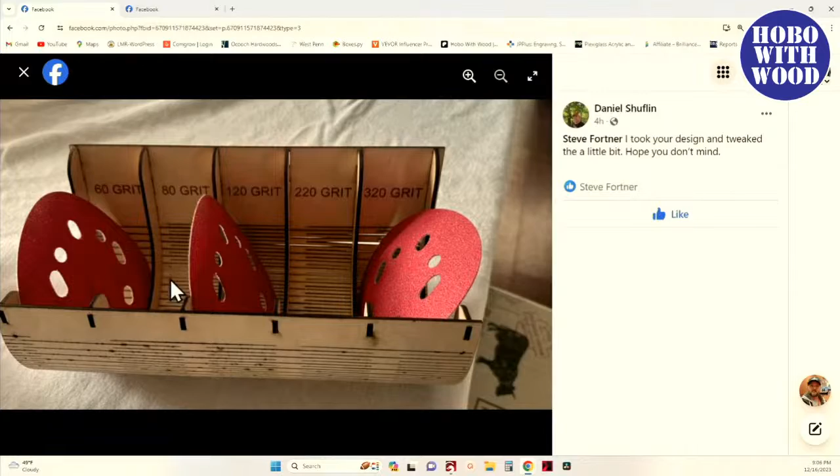That is a really neat way to organize them and set them up. There are a couple of little flaws in here that could be made better. The living hinge is a little rough, but I'm going to show you how to create your own living hinge so you don't have any problems, because living hinges aren't great to just scale up. They're not really that scalable. They need to be more rigid instead of done like what he did there.

But let's jump into Lightburn now and take a look at... let's see, I'm going to close that and open that, and now switch. Okay, hopefully you're seeing my Lightburn.

So the one absolute thing I know is that the sanding disc is 5 inches, and I know that I need a lip that's taller than the diameter of that disc. So that's where I started. I started with trying to determine that width and that shape.

Back to Lightburn. So if I've got a 5-inch disc and I want an inch gap, I started out with drawing a circle, a 3-inch circle. Let's lock the aspect ratio, make it 3 inches, then do an offset of an inch, and say okay. So now I've got a 5-inch - if you look up here in the top, the width, I told it to do an inch but it didn't quite go an inch, it's 4.9999, so I'm going to round that to 5 just because I'm that way. And we'll put that in the middle of the table there.

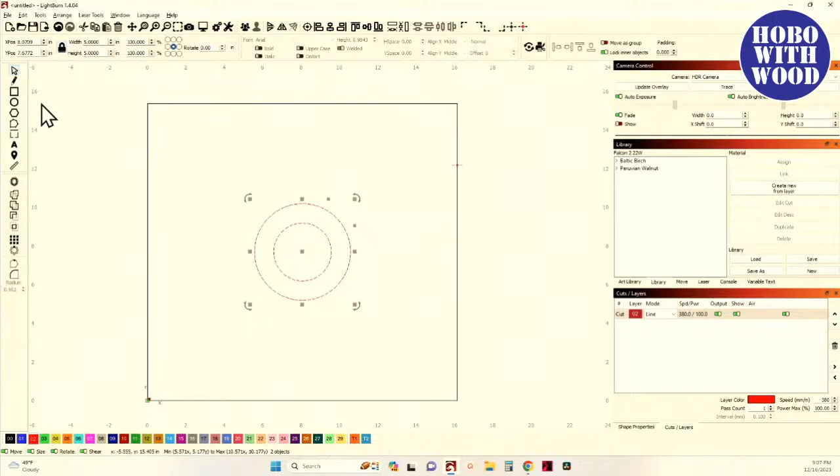Now with that done, that's one way of generating them. Another way is you simply hold your shift key and draw out a circle, continue to hold it, draw out another circle - and this is going to make sense to you in a minute why I'm doing this, this is one of those roadblocks I was talking about. So we're going to take that circle and make it the 5-inch circle, and we'll make this one the 3-inch circle... there we go. And now center those up.

Now those look identical, right? In fact, what I'm going to do is group that one and group that one, put them at the same level with each other. Now what I'm going to do is draw a rectangle and bisect those, cut them in half. So I select my rectangle tool, draw out a rectangle, and make it a height of 2.5 inches. I want to make sure it's long enough to go past both of those circles. And now, group those, put that rectangle in the middle of that.

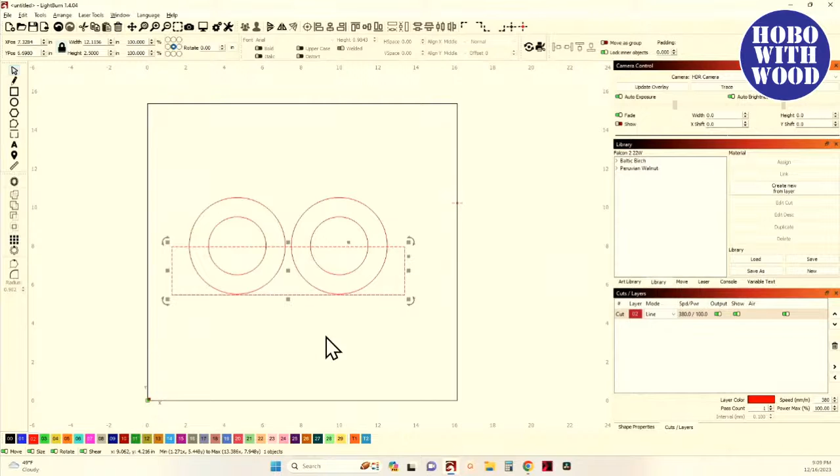Now these are grouped, and this is going to be my cutting tool. I want to keep these lower halves, I want to omit that. So I put the rectangle, or my cutting tool, around the pieces I want to keep. I select my pieces first, hold my shift key, then select that rectangle, and then come up here to tools and cut shapes, or Alt-Shift-C, cut shapes.

Now what that's done - you see the Vegas lights, or the ants running around there - those top halves are selected. So now you can just hit your delete button and delete them. Well, those are identical, right? They should be identical. But this is how I messed up the very first file that I created, and it didn't work.

Because if you look, we're going to ungroup all this. That 5-inch circle cut in half should be a 2.5 inch high arc. But if we go to our ruler and actually measure the segment lengths, if we look here, that segment length, and I'll try to get it as close as I can, going from the top to the bottom. Oh, look at there. There's a problem. It's not exactly half. That segment length is 3.8261, and that one is 3.8. They're not identical. You've got these little bitty pieces in here, and that's a problem.

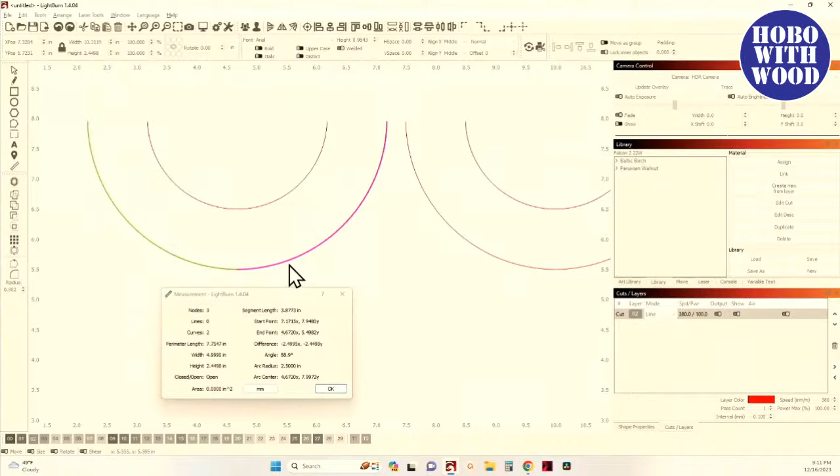Now let's see what this one is. This one is 3.8773 and 3.8773. These are identical. And the difference between this grouping and this grouping: this pair right here was done by creating the initial 3-inch circle and then doing an offset of 1 inch to create the 5-inch circle.

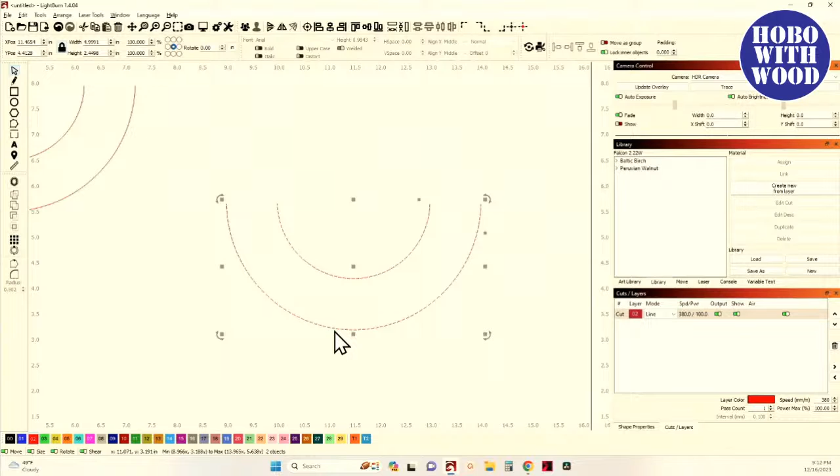This was created by using the primitive tool to draw out a 3-inch circle and then a separate 5-inch circle. So these started out as 2 primitive shapes, 2 circles. This was actually 1 circle and 1 line in the shape of a circle. An offset is not a primitive shape. An offset is not a circle. In fact, we'll undo it and go back before I cut them,

and we'll get rid of that square. We look at just that outer piece. In fact, let's look at this one first. We go to nodes. You don't see any nodes because it's a primitive shape. You have to convert it to a path. And when you do, you will see 1, 2, 3, 4 nodes, and that's all there is.

But if you look at this one, I got the selector tool. This one is the offset of the original 3. Put that back in the middle, and then we go to nodes. I do not have to convert it to a path because it's already a path. It's not a primitive shape. It is a line in the form of a circle. And if you look down here, there's these extra nodes in there. And that's what screwed up my initial design.

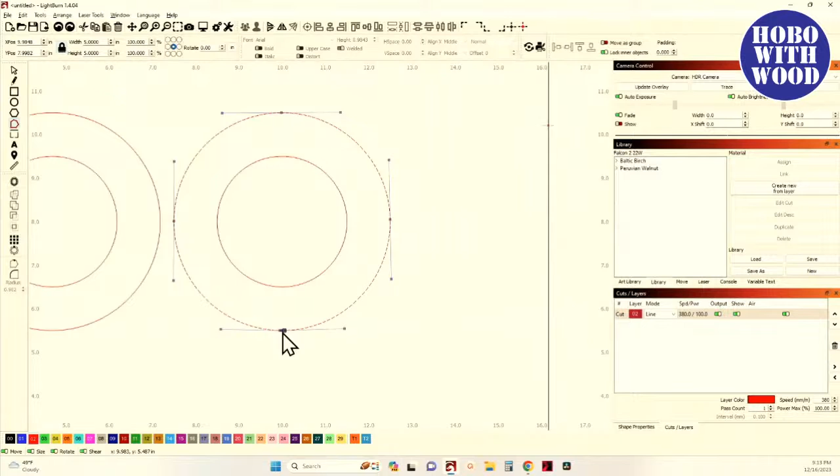I wanted to show you this because you could achieve those arcs in 2 different ways and get what looked like the same result. They weren't. The tricky part of this, if there is a tricky part, is how long does this piece need to be to wrap around there? Well, you're going to measure those arcs and those tangents.

And when there are little bitty pieces hiding in there and you're not aware of them, it throws your whole design off. How do I know? Because I screwed it up. I learned everything I just showed you when I screwed up that first attempt. So we're going to get rid of that. These are the ones that we want to keep.

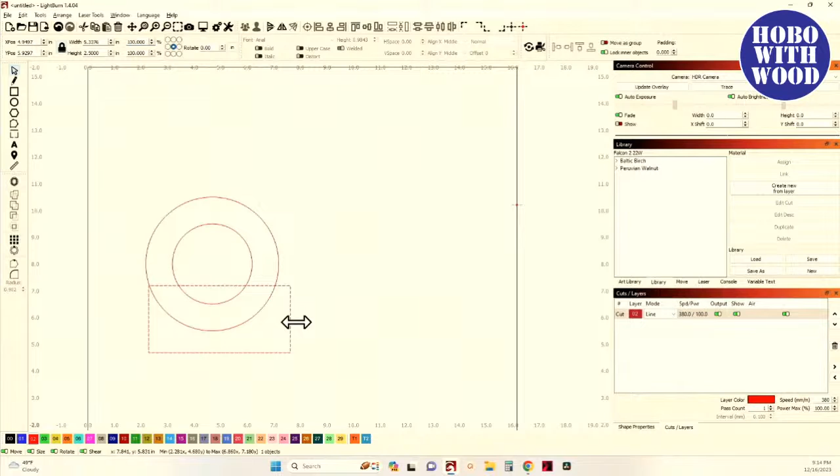I'll just draw another rectangle really quickly and make it 2.5 inches tall, 2.5, and draw that out to there. Group them back. Put that in the center, at the bottom, so it's 2.5 inches. Again, those are grouped. That's the shape that we want to cut. This is the piece down here we want to keep. The rectangle is our cutting tool.

We select our shape first, then hold shift and select that, and go to tools and cut shapes. That will select this up here, and we can just hit delete and get rid of it. Okay. Now I'm going to switch back. Does anybody have any questions about that? That's pretty simple so far.

And I got to get passed down here to everybody. Very good, very good. Any questions? I'm going to count to 10, and then we're going to jump right on because we're going to try and make this go quick tonight.

Okay. All right. Good. No questions.

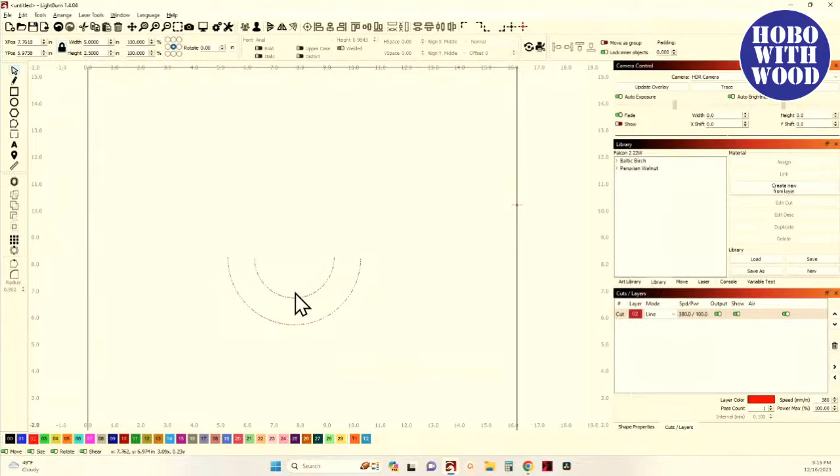All right. So now we're going to switch back. Now this is the bottom half of that tray. Now I need to figure out the back piece and this top over here. And to do that, now I know that this should be an inch gap between them. But if I didn't know that, this is how you can figure that out. These are already grouped. I'm going to leave them grouped for right now, but we'll ungroup them in a few minutes.

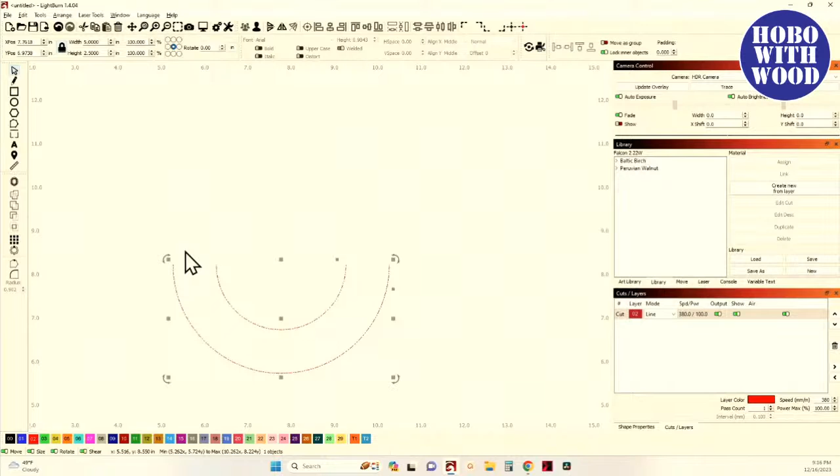I'm going to come back here to my square tool, and I'm going to come right down here to this inside one until I get my crosshairs. Once I get my crosshairs, I want this to be a perfect square. And to do that, I'm going to hold the shift button and just drag it straight across to this line until I get the crosshairs. Now I can release, and I'm done. I've got a perfect square.

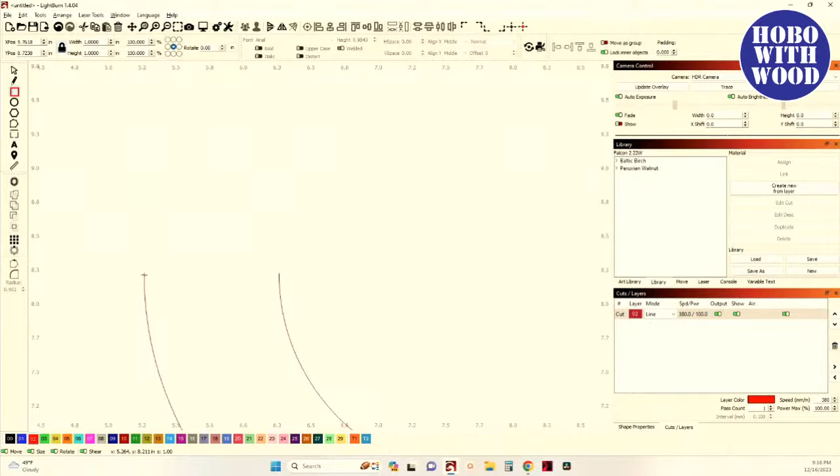And now if I look right there up in the top, there it is, 1 inch by 1 inch. And that's what it should be since this is a 1 inch spacing. Now over here, I do not want to have it to be a square, but I can still do the same thing. Get my crosshairs, draw a straight line, come over here and get those crosshairs. And now select that, unlock my aspect ratio, and I'm going to make this one 3 inches tall.

But now I want to show you something, and I'm doing this screw up here on purpose to show you how you use the anchor points. I've tried to show you those in the past, and sometimes it doesn't always come through. Right now, you see the anchor point is in the center of these radio buttons up here, and I'm changing my height to 3 inches. Or not, that was the width, so undo, got to change the height. But now you see, it's no longer positioned correctly.

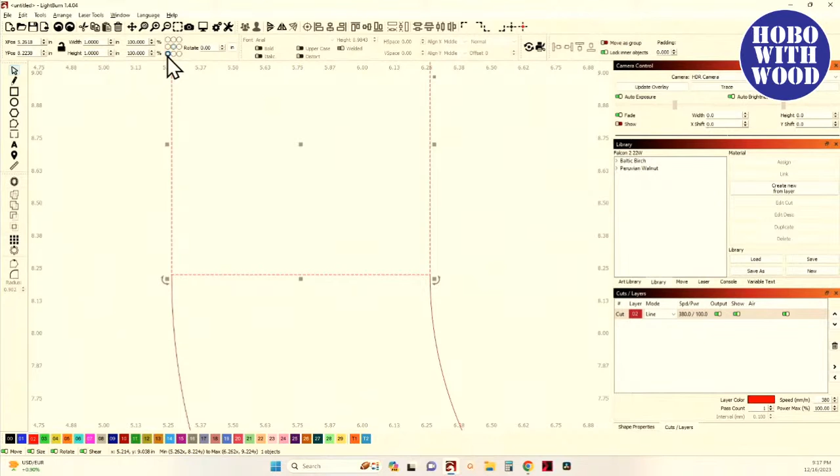So now I've got to either readjust all that, or if you know in advance, that's what these anchor points are for. I designed that from this corner right here. That's where I want that to be anchored at. So I'm going to come up here and select that lower left anchor to anchor that design right there, and now change the height to 3 inches. And now nothing moved. It's up where it needs to be, and that's the positions that everything needs to be in.

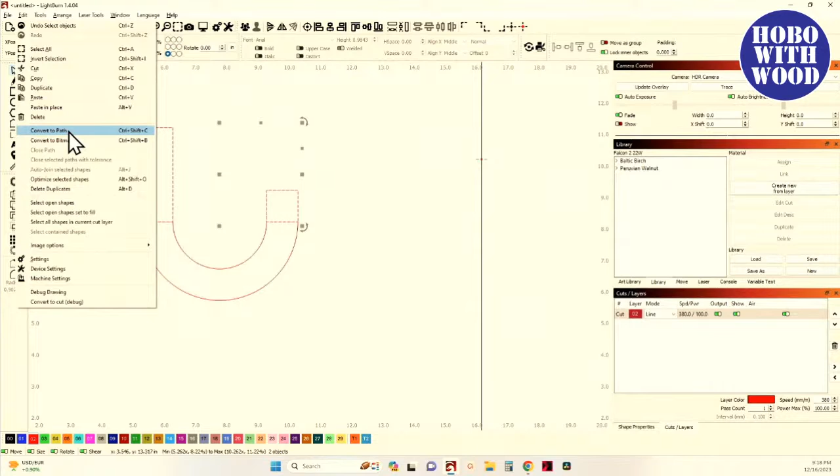I'm going to select this square. I'm going to convert it to a path, both of them, edit, convert to path. Then go into node editing. And while I'm in node editing, I'm going to come down here to these two lower lines and just hover over them anywhere where I get those little half crosshairs and hit the letter D. The letter D as in David or delete. Not the delete button, but the letter D. And now that got rid of both of those. Now we've got our basic shape going on.

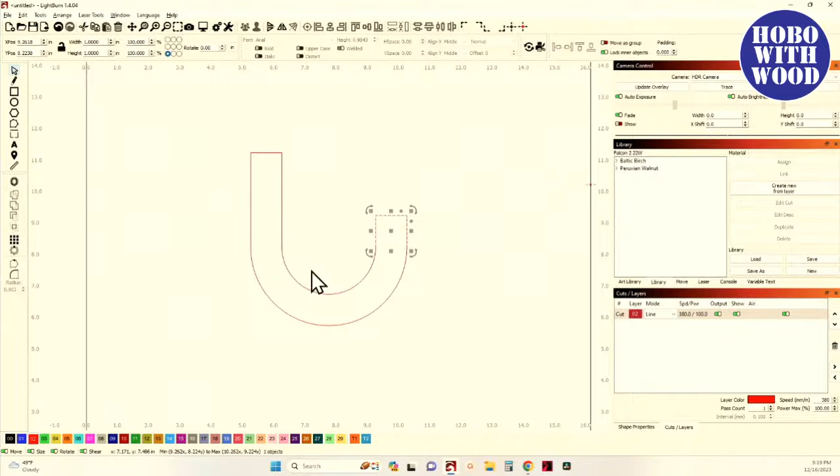These are grouped. We need to ungroup them. And now if I select this whole piece right here, if you look down here at the bottom of LightBurn, it shows you that there are 5 objects. That's 1, 2, 3, 4, and there's a 5th one in there somewhere. We need to create, obviously, one piece out of that. And all you have to do is select that whole thing. There's 5 objects. I was looking to see where the ants changed. I don't see them changing direction.

But right now with that selected, I'm going to hold Alt and the letter J. And if you paid attention there, the ants changed direction. I'll undo that. So right now you see the ants are running down. Sometimes when you've got multiple pieces, where those pieces line up, they will actually be running into each other. But with all those selected, and I hit Alt-J, you can watch those ants change direction. And that lets you know that it just did something.

But you can also look right down here at the bottom of LightBurn, and it no longer says 5 objects. It says 1 object. That is now one solid piece, welded together. And that is the basic shape for the side of the box. Have I lost anybody yet? Anybody got any questions on anchor points, Alt-J, node editing, the letter D?

All right, the next step we need to do is add the slots and tabs to this side piece. And it's like, okay, well, where do they need to be? Well, positioning them on this piece now is not as crucial as the placement of where they're going to be on the living hinge. But I like them to look good and spacing be right. So I keep in mind, I had that 3-inch piece on the back, the 1-inch piece on the front, and I'm going to design my tabs according to those dimensions, because those tabs have got to be on those flat areas.

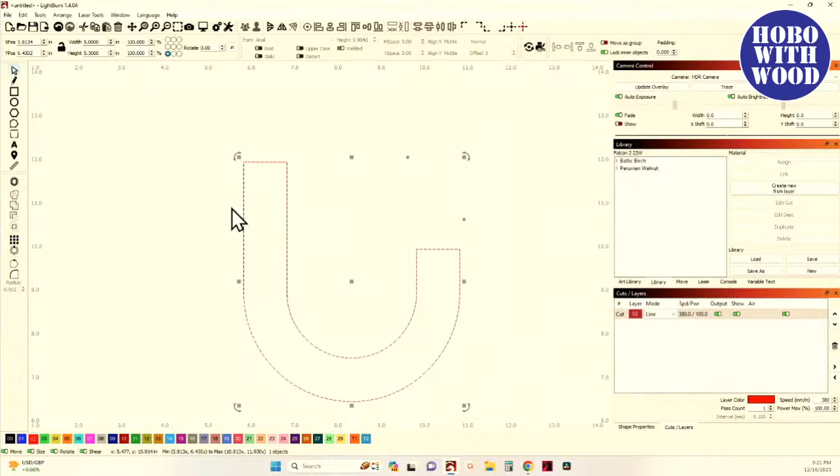So I generally design with 3mm wood. So I'm going to switch temporarily. Actually, you know what? I'm not even going to switch. I'm still in the inches up here. And I'm going to draw out a rectangle. And I want that rectangle width to be 3mm. Well, without having to switch that, I can just come right up here and put in 3mm. And that's going to convert that to 3mm. It shows you now in inches, but that's 3mm. And I want the height to be 1/2 inch.

And now I'm going to grab those crosshairs and drag it up there and snap it right to the corner of that piece. Now, this is a 3-inch flat side that I want those tabs to be on. And I want them spaced out to look good and also be functional and as strong as possible. So I'm going to come up here to my gears, and change my arrow move to 1/2 inch. And I'm going to move that down 1/2 inch. And I'm going to start there.

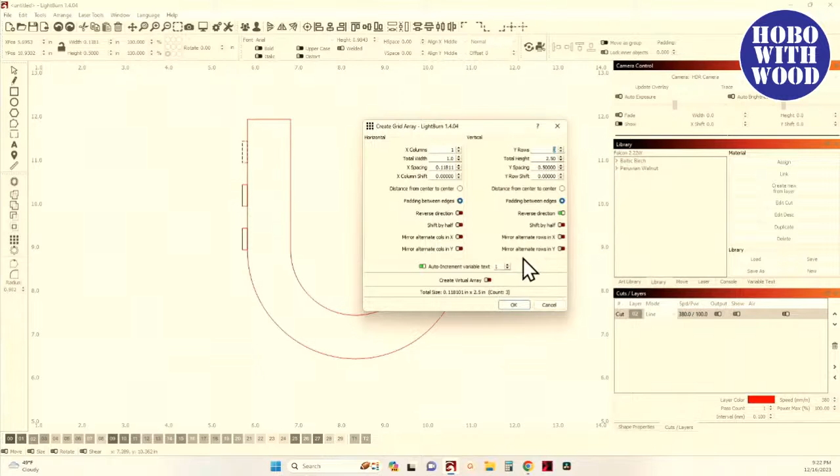And now I'm going to create an array of 3 rows with a 1/2 inch Y spacing. Now those are a 1/2 inch from the top, and they're spaced out evenly. But if I look at where this one landed, it's right at the very bottom of that 3-inch tangent. So I don't want to do that. I'm going to grab them, group them, go back to my gears, and put that at a 1/4 inch. Say okay. And now just use my arrow up. And now that's a 1/4 inch from the bottom of that 3-inch tangent and a 1/4 inch from the top of the piece.

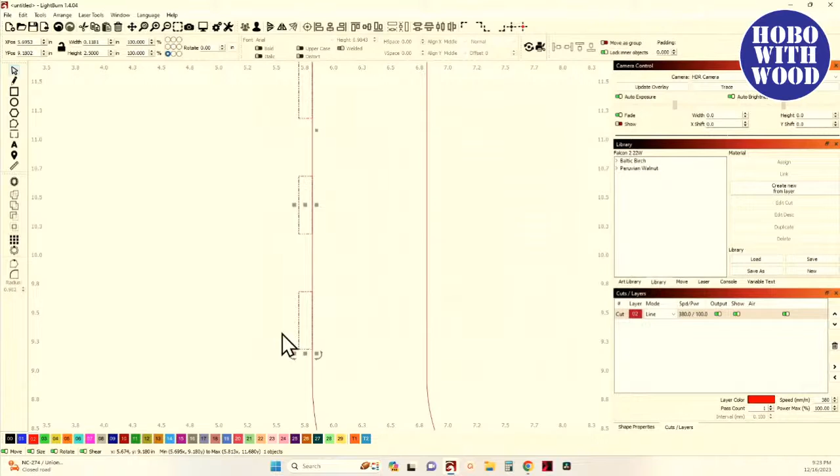I'm going to ungroup that temporarily. Control D, duplicate that, arrow it over. Group those back together. Control D, duplicate them, and I'm going to put them on a toolpath. That duplication's on a toolpath, and I'm going to arrow it over here because that's going to be just what it is, a toolpath. I'm going to select that, Control D, duplicate it, put that on a toolpath, because I'm going to need that just as it is to get my measurements in a few minutes.

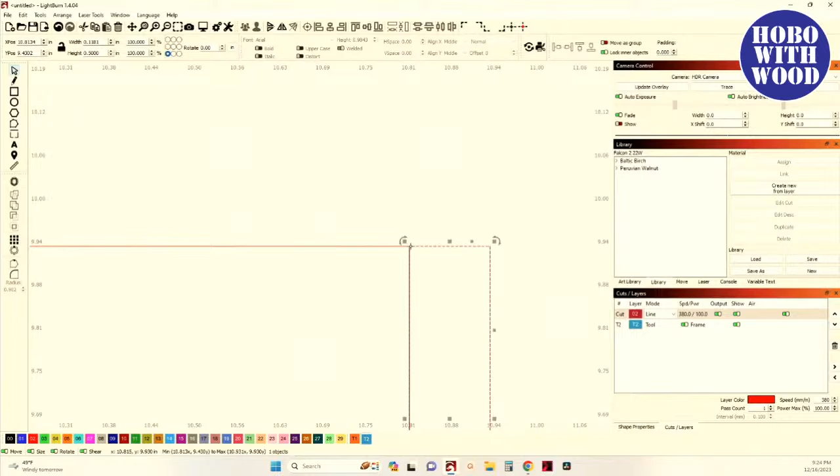Now I need this piece, and I'm going to dock it right up there, snap it into that corner. And since I just changed my move to 1/4 inch, and that's a 1/2 inch, and I've only got 1 inch to play, I'm just going to arrow down one time, and now that's centered over that 1-inch piece. So now with that selected, hold my shift button, and before I do that, I touched on this with the other box, but maybe not everybody was there for that. If I ungroup all these and select just those 4 tabs, if you look down here at the bottom of LightBurn, it shows those are 4 objects.

And your Boolean tools will not work with multiple objects. You can only add and subtract 1 or 2 objects. You can subtract A from B, or you can weld A and B, or get a difference of A from B, but you can't do it with multiple objects. So what you have to do is we're going to group all this. Right now, you see it's 4 objects. If I group that, those 4 shapes are now one object. And by becoming one object, now you can hold your shift key and select the main piece.

Well, select that. Is it all grouped? Yes. And then that. Wow. Now see, this is the joys of going live. What have I got wrong? Is that not a closed shape? Edit, close path. All right, that's an open path somewhere. Because this hasn't happened any time I've designed this.

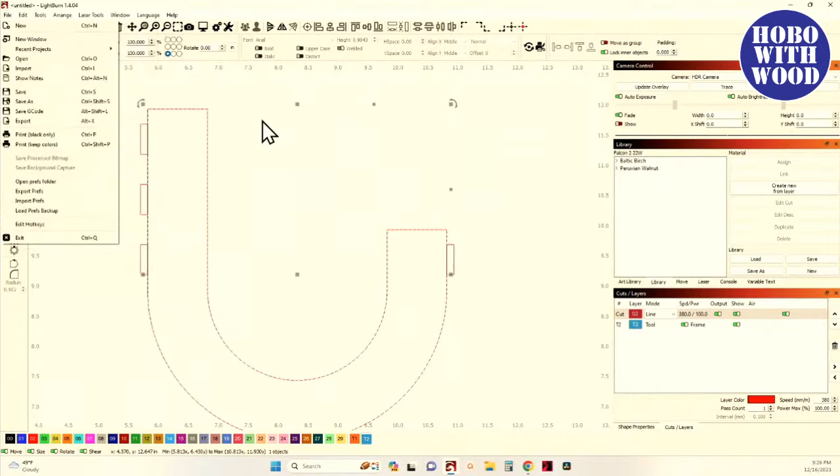Undo, undo. Now, let's see if that's an option again. Edit. No. Did not go back far enough. Let's see. Edit. Nope, whatever. That closed path is done.

But sometimes closed path, you can fight it and fight it and fight it. And you can actually go in and you can close path with a tolerance. But I've had that give me some adverse results where if you tell it to close with it, then it puts some crazy line that goes off somewhere that you didn't want it to be. So another thing you can do is instead, when it doesn't want to close a path with that piece that's an open path, do a 0 offset. Do a 0 offset, and that'll create that duplicate, and it will close the path.

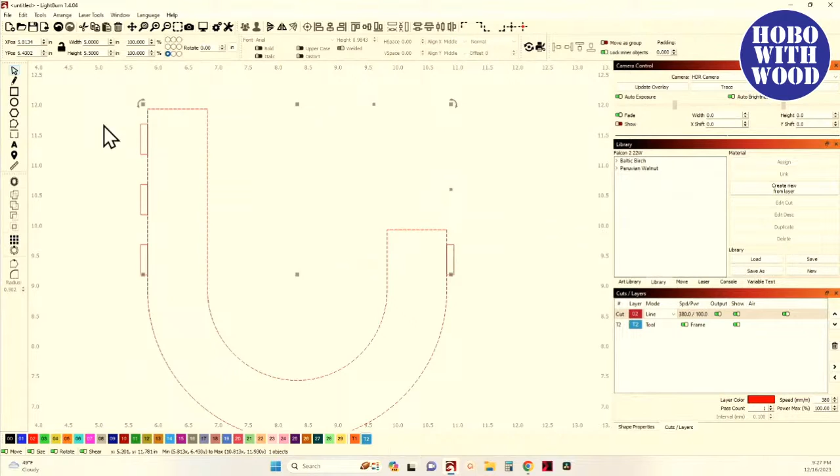But this now is a closed path, and if we select those, now you see our Boolean tools are no longer grayed out. I can just weld those together, and those tabs are in place. I can now say Control D, duplicate it, and use my less than symbol to rotate it counterclockwise, and then arrow it over, and those are in position for me to cut out. I'm going to grab those and slide them off the tool bed for right now. Those are designed and ready to go, and I'm ready to start working with these tool paths to start figuring out my living hinge.

But before we do that, does anybody have any questions? I see some people going, okay, wow, that's new to me. You know, all kinds of new things going on here. Does anybody have any questions, or have I lost anybody? Have I blown anybody's mind? They're like, wait a minute, back up that thing.

Let's see here. Could you do the same thing with the weld button? I'm sorry, Chicago Bob. I'm not sure which same thing with the weld button, but you've seen me weld those together. But you can only weld them once they're a group. You can do each individual piece, but I'm not sure exactly because I missed your question. Lori: whoa, you just blew my mind with that entry of 3 millimeters in the height, and that auto conversion is cool.

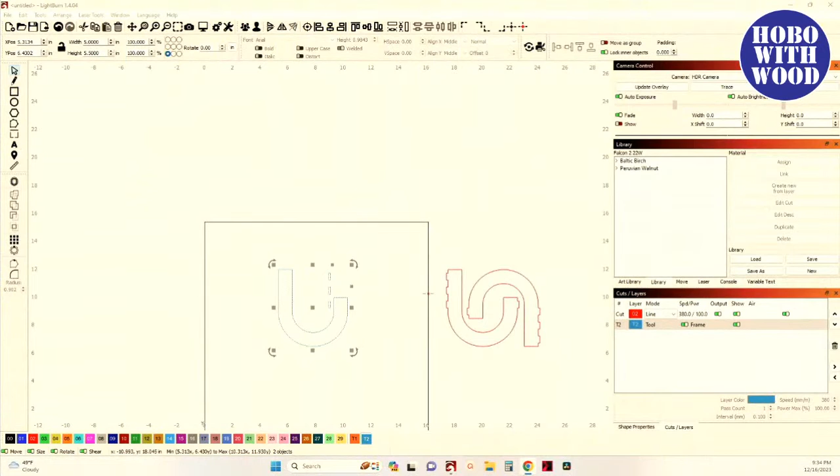All right, so now we're going to jump back over to LightBurn, and we're going to look at how I determine how long this piece needs to be. How long does this need to be, and where on the piece does that living hinge need to be placed in order for it to function correctly? And that is what we're going to do now. Let's switch. All right, so I made a copy of that first piece before I put the slots and tabs on it, because I'm going to need to know the measurements of each one of these segments in order to be able to determine the length of that piece as it wraps around that whole piece.

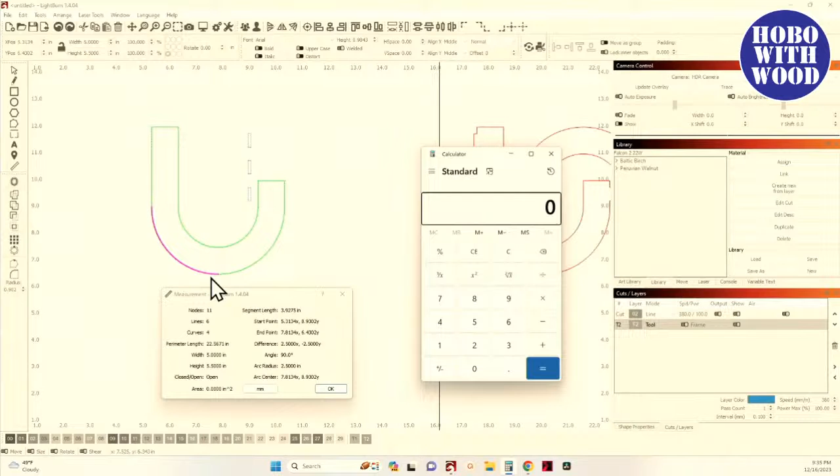So I'm going to use my ruler, and I'm going to look at each segment on the outside of this. And I'm also going to open up my calculator. So I've got there, I have a segment. We know that's 3 inches because I added 3 inches there. We know this is 1 inch because I added 1 inch there. And because I know, I learned about not doing the offsets, that there are only 2 tangents and they are equal. 3.9265 and 3. No, they're not equal. Look at that. I just seen that 3.9265 and that one's 3.9275. It's off by a couple thousandths.

Let's see if there's an oddball tangent in here anywhere. And there's the 3 inch, and there's nothing between that 3 inch. And I come down here and there's nothing there. And I'll go up here and nope, there's nothing there. It's just a slight variation in the roundness of that circle. But what I'll do, come to my calculator. I know that's 1 inch, so I'm going to say 1 inch plus, and this one is 3.9265 plus.

Did I get that right? Yeah, 39. Okay, and then plus 3.9275 plus the 3 inches. So 11.854.

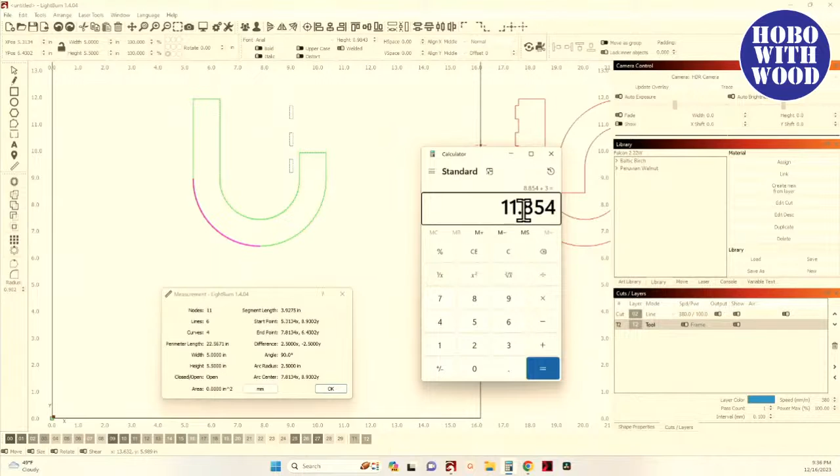11.854. So I'm going to draw out a rectangle and tell it its height needs to be 11.854. Is that right? Yep.

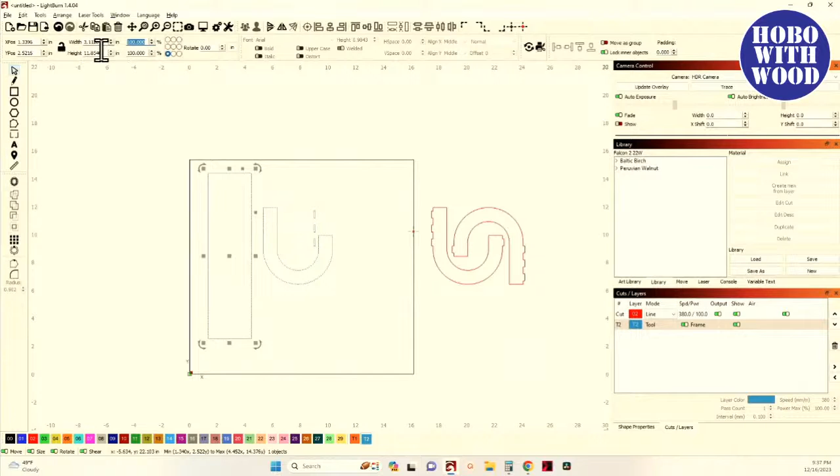Now I need to make it however wide I want it to be in order to stack those stacks of sanding paper. I'm going to go with 3 inches. And I'm going to make sure my aspect ratio is unlocked so I don't change my height, and just tell it to go 3 inches wide.

So now there is the total length of that segment that's going to wrap from that corner all the way around to that corner. But now I need to know where my living hinge is going to be placed.

Well, this is actually extremely easy. We know that this is a 3 inch flat space, and this is a 1 inch flat space. So I'm going to draw out a rectangle here, select my rectangle tool, and draw out a rectangle here and a rectangle here. I'll give that the dimensions of 3 by 1 and give this one 3 by 3.

And why 3 by 3? Because this is 3 inches in length here, and this is 3 inches wide. 1 inch straight edge here, 3 inches wide.

So now with that selected, I'll pick that. In fact, first I'm going to go ahead and put this on my cut path so we can see it a little better. But I'll leave this on a tool path, and put it in center top. Select that one and put it in center bottom.

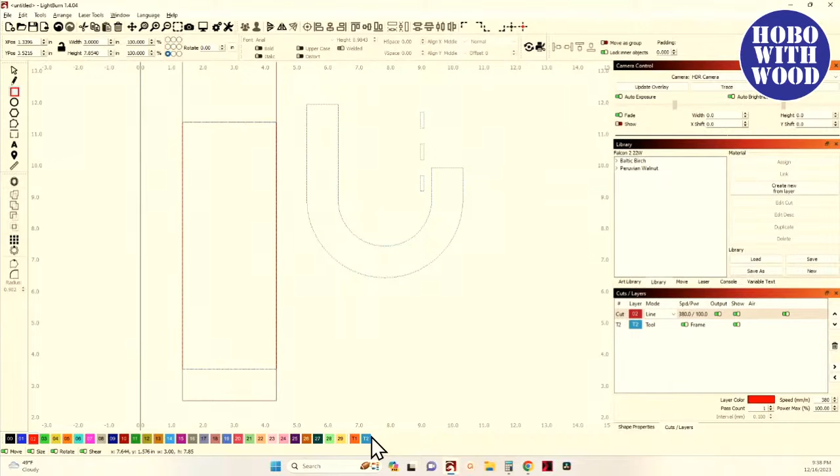So now that space in between there is all living hinge. And I can actually, if I wanted to, just get my crosshairs right there. I didn't mean to move it. I meant to draw a rectangle, get my crosshairs, draw a rectangle down to those, and put that on the tool path. Then I could eliminate those other tool paths, and that's the only one tool path I need. But that's the size of the living hinge right there.

So I'm actually through with this piece right here. That can go bye-bye. But I'm going to need those because they're going to have to be positioned up top, and I'll have to put one down here at the bottom. In fact, we'll go ahead and do that now and put those on a cut path.

I will ungroup, duplicate that, move it down here. That's going to go at the bottom. Group these back together.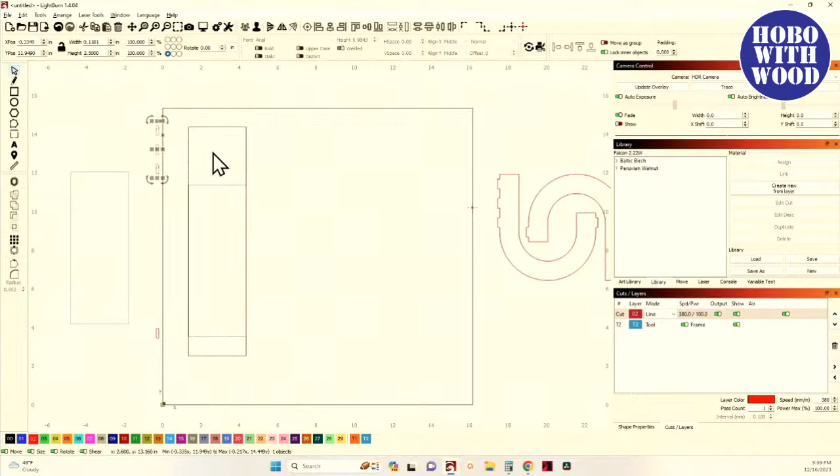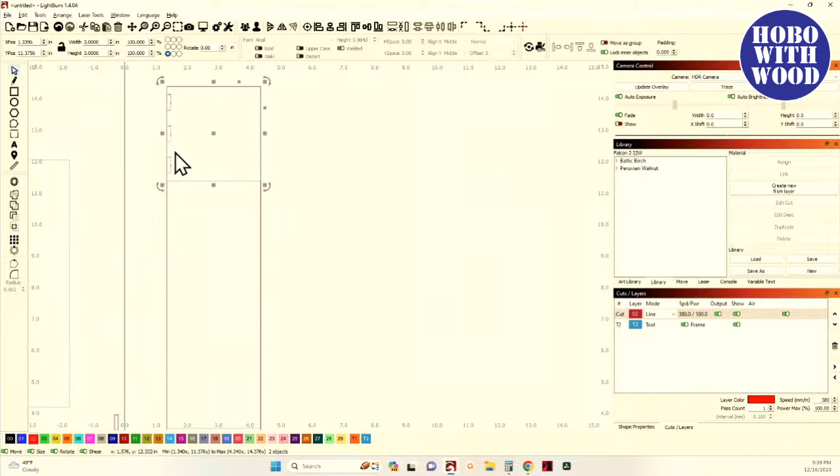And I've got those selected. I'm going to hold my shift button and select this 3 by 3 toolpath up here, and tell it to align to the horizontal center. Then I'm going to align it to the inner left of that. That's not where I need it, but now it's centered and in a fixed position that I know where it's at. And I have my moves set to 1/4 of an inch.

So now I can select just those, and one arrow in moves it in 1/4 of an inch. Control D to duplicate it, then hold my shift key, select the toolpath again, align it to the right, then select only that, and one arrow in puts that 1/4 inch in. So now those are where they need to be.

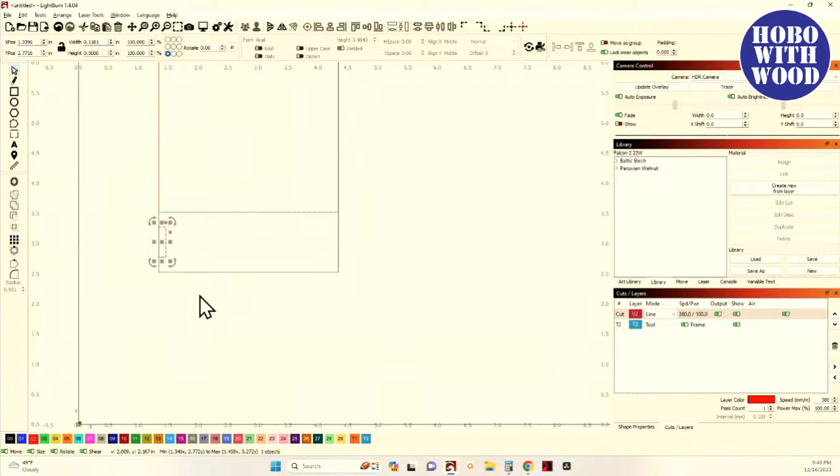Now this one, I'll do the same thing. Here, I'm going to align it to horizontal center, then align it to the left, and select just that, one arrow in, Control D, select just that toolpath, align it to the right, and then select just that slot and move that in 1/4. Now the slots are exactly where they need to be.

Height-wise, position-wise, to line up with these tabs. Now all I have to do is create a living hinge. Any questions?

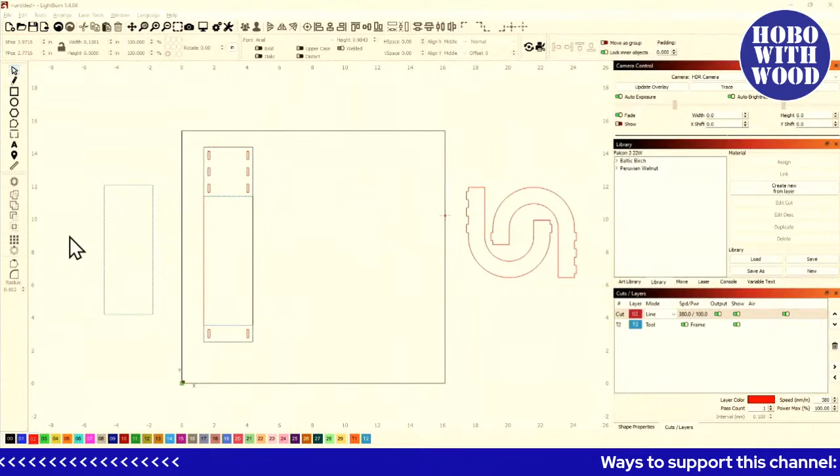Now let's get into designing the living hinge. So back to Lightburn. All right, so this is a 3-inch wide piece, and I am all about being symmetrical. I want things to look, not only function, but I want them to look as well or better than they function. So before we design that, when I'm working with living hinges, I take into consideration the thickness of my material on how I'm going to design my living hinge.

I'm designing this to where it's going to work well with 3mm wood. And I want it to be as strong as possible, but also have as much flex as possible and maintain that flexibility. There's no scientific proof for this, I haven't seen any math for this, but the way I think this works, it's going to be strongest if you keep it so that when you look at the cross section of one of those cuts, it's no less than a square. So my gaps between my living hinge are not going to be any narrower than the thickness of the wood. So when you look at that cross section, those are little bitty tiny squares all the way down through there.

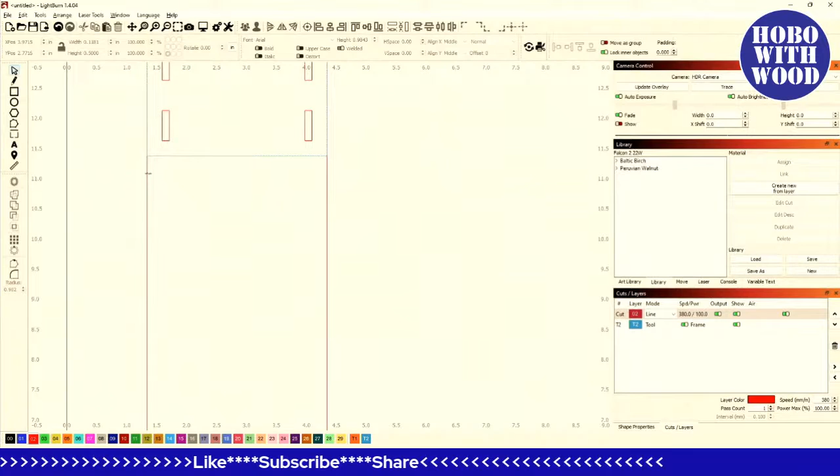So with that, when I set up my spacing, I'm basing it off the thickness of my material, which in this case is 3mm. And I've got a 3-inch wide piece, and I want to have 3 solid lines going across it. So now we're getting into math again.

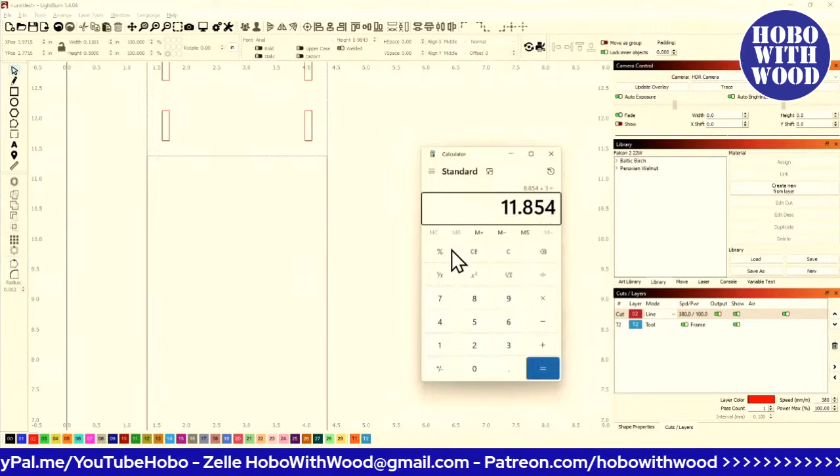I'm going to open up my calculator and clear it all out. What do we know for sure? We know that we have 3 inches, and 25.4 millimeters equals 1 inch. So 3 times 25.4 millimeters, 3 inches is 76.2 millimeters.

That's the total width. And if I'm going to have 3 solid lines going across my living hinge, that means I'm going to have 2 gaps. And if my gaps are 3 millimeters, I'm going to subtract 6 millimeters. So now I've got the total distance of what those 3 lines will be, and I just divide it by 3. So 23.4 millimeters is the length of one of my lines.

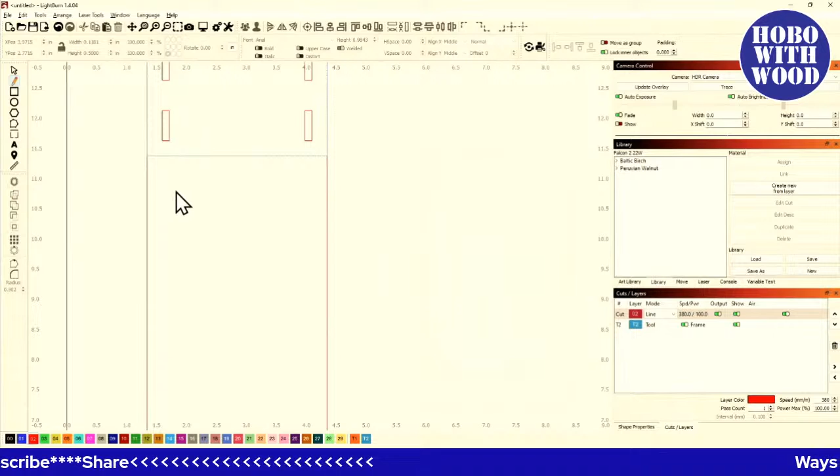So I'm going to come up here to my line tool, start a line, hold shift, and draw out a line. Now I can select that and just tell it to go 23.4 millimeters, not 20. I'm in inches, and I'm going to stay in inches. 23.4 mm. And there we go.

Now I'm going to grab that and bring it up here to the top of that tool path. Get it right in there.

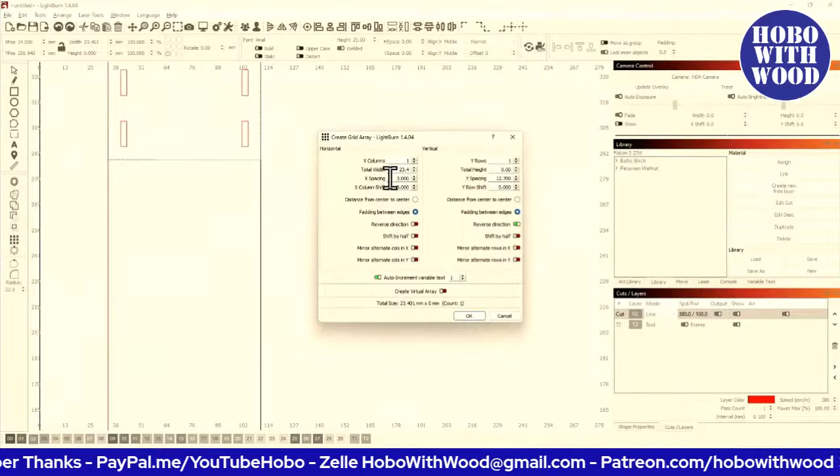And now if I do an array, 3 columns, and I'm going to switch over to millimeters now, because I don't know if you can do the conversion here, but we're going to do 3 columns with an X spacing of 3 millimeters. And right now it's kind of hard to see because they're right on that tool path. But those 3 lines start at the end of the edge and end at the edge with 3 millimeters in between them because we did all the math to begin with.

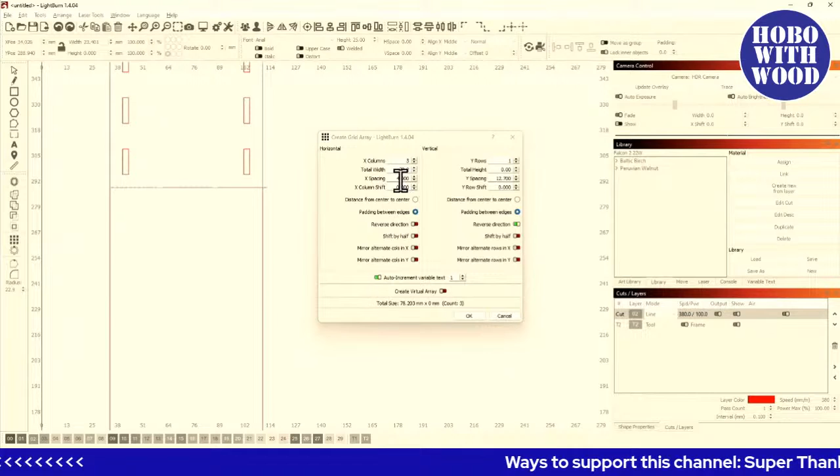And I just changed something. Let's cancel that. I did that with my scroll button and didn't mean to. So array, 3 of them, done. Now that's 3mm spacing. That's one line.

Now, if I go to 2 rows, I need to have that 3mm spacing again. But now those are just stacked on top of each other, and that's not a living hinge. We've got to come over here and shift by half. So click shift by half. And now we're starting to see the semblance of a living hinge.

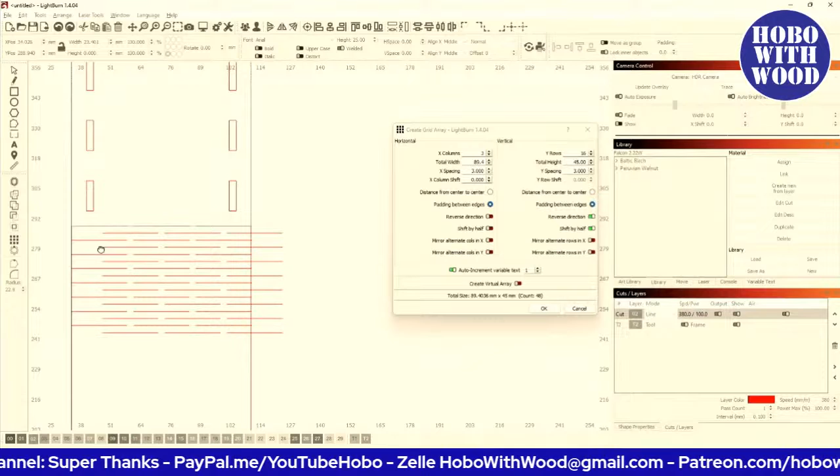But these are not going over here to the edge. So what I'm going to do is create another column to extend that out so that I'm going to have 1, 2, 3 with this one protruding behind it. And it'll make sense in a minute.

But now I'm going to come down here to where I can see this line on this toolpath. And I'm just going to come here to rows, and hold that number until it populates all of those necessary rows. And I'll go back one, and that's going to work.

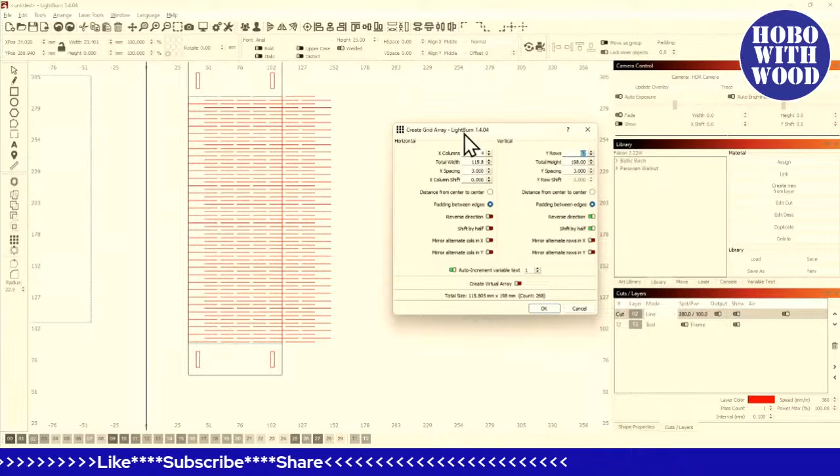Now, one thing that's going to change in Lightburn 1.5, thanks to yours truly. Right now, when you do a grid array, you've got your original piece up here that's selected, and when you say OK, you're going to have just that piece selected. There is nowhere to check so that it selects your new array instead of just that single piece. So when you say OK, you're back to that one piece. But in version 1.5, that new option will be there so you can select your end result.

But now what we need to do is come up here and just drag from left to right and get all of those pieces of that living hinge and group it. And now that that's grouped, I can come over here and grab the outer rectangle and tell it to go to center.

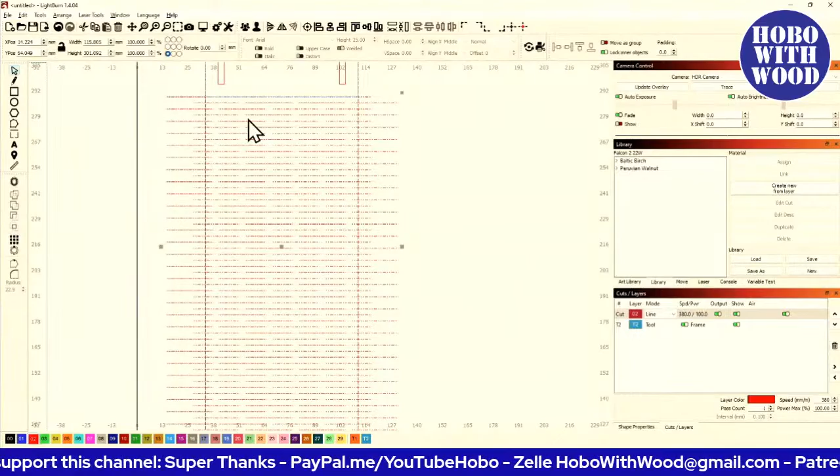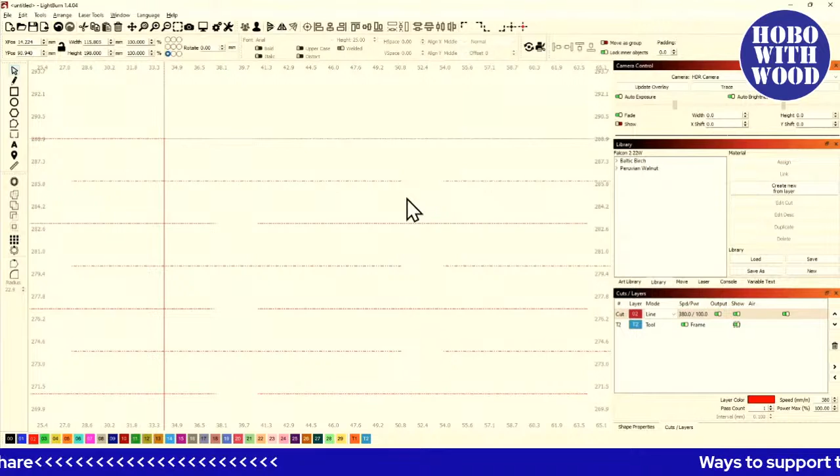And nope, center is not what I want. What I'm going to do is take... I'm going to turn off these toolpaths. There. I'm going to, and actually, now I need to see that toolpath. I'm going to get those 3 lines, 3 solid lines.

Actually, you know what? I forgot, there's an easier way to do this. Ungroup those. What it is, I don't need these end pieces right here, these protrusions. So I'm going to get rid of that whole column by selecting just that and hit delete. There, that's where I screwed up.

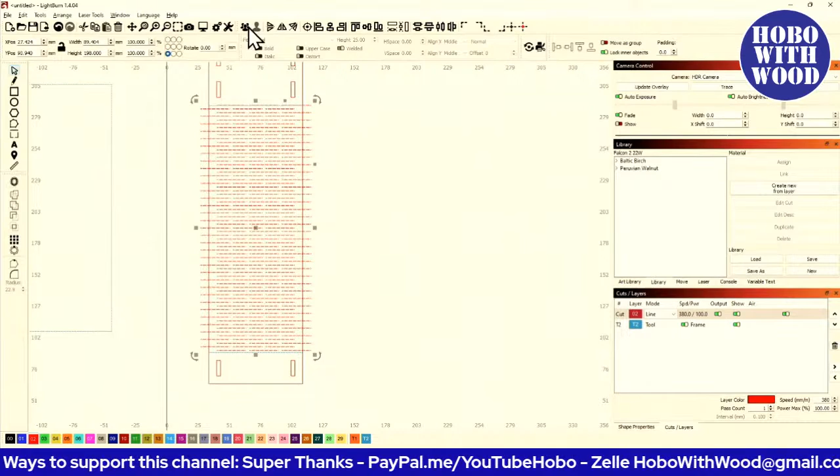And now I don't need these. Delete. Group all that. And now center that up.

I'm still not doing what I wanted to do. I'm going to align it to the left. That's what I want to do. Sometimes it ain't firing on all 8 cylinders. So by aligning it to the left, that put that solid line all the way to the edge, and that ends with that solid line at the edge. But now I've got this one little piece that hangs out. Well, we can use our cut tool to get rid of that.

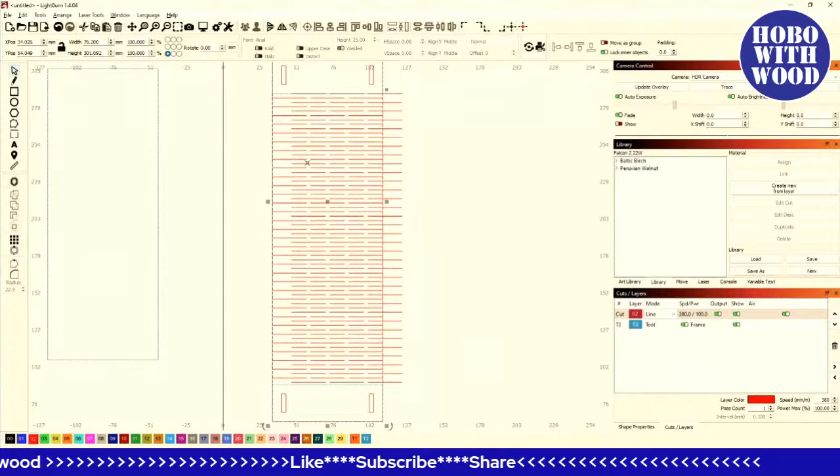So now what I've got to do is I've got to duplicate this outer perimeter, because if I use this as my cut tool, it's going to disappear. In fact, I'll show you. I'm going to select my array and then select that outer perimeter and use the cut tool and say cut shapes. Now my outer perimeter is gone. So when you use a shape as a cut tool, it disappears.

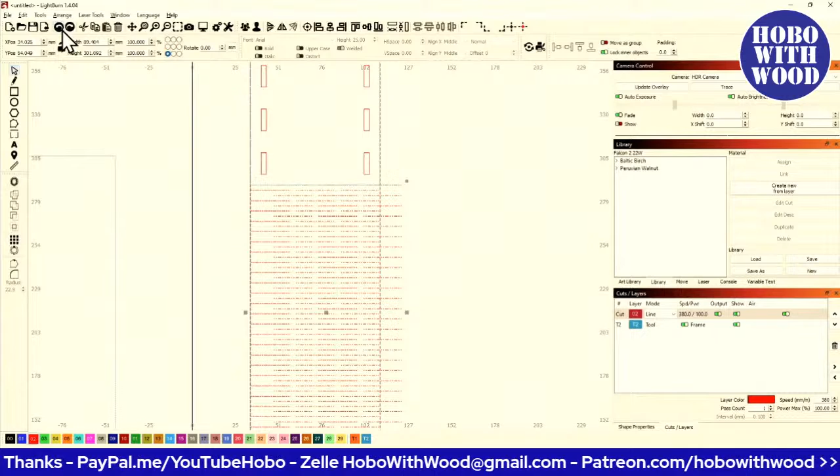So when you need to do that, you need to select it and do a duplicate. Control D, duplicate that. Then select your array, hold your shift button, select that outer shape, hit your tools, cut shapes. That will leave you the remaining out here that you don't want. Hit your delete button. Dadgummit, it's still not lined up right. I should not have deleted that other piece over there when I did it. But you know what? How easy that is. There.

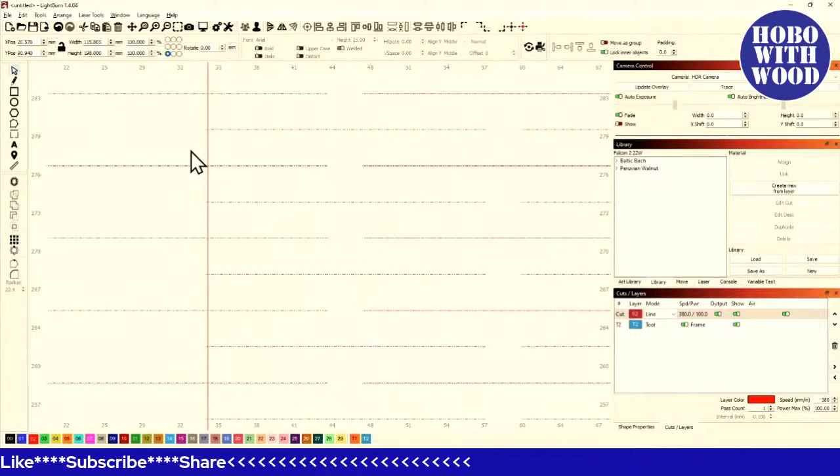And I've done this so many times, group that. And now with that like that, I'm going to position that right on the edge. And that's moving. You can't tell it's moving, but it's moving ever so slowly. I'll change my gears. Not that settings. Not that. Come on, silly. Get your fingers right. 0.002. Say okay. And now move that in like so.

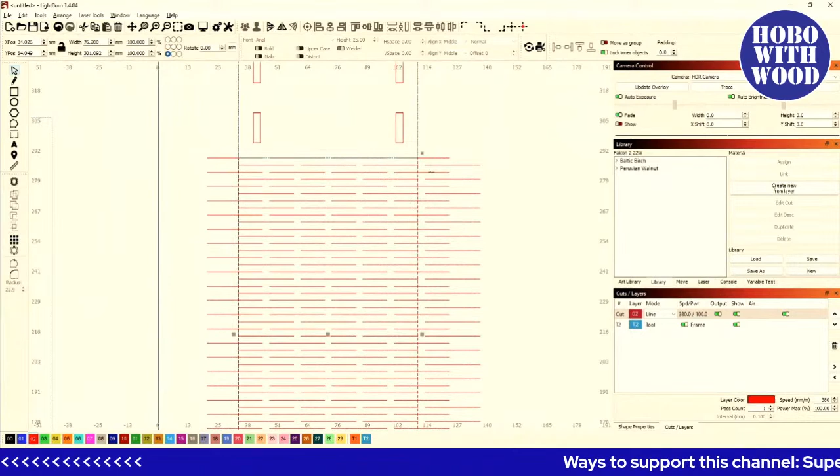And now I can do what I did to begin with that I did wrong. Duplicate, Control D, and grab, and then hold Shift, grab that, and cut shapes and delete. And now that's centered up like I want it. That's the symmetry I was looking for. So I'm sure I've probably lost a few of you because I got lost in that myself just then.

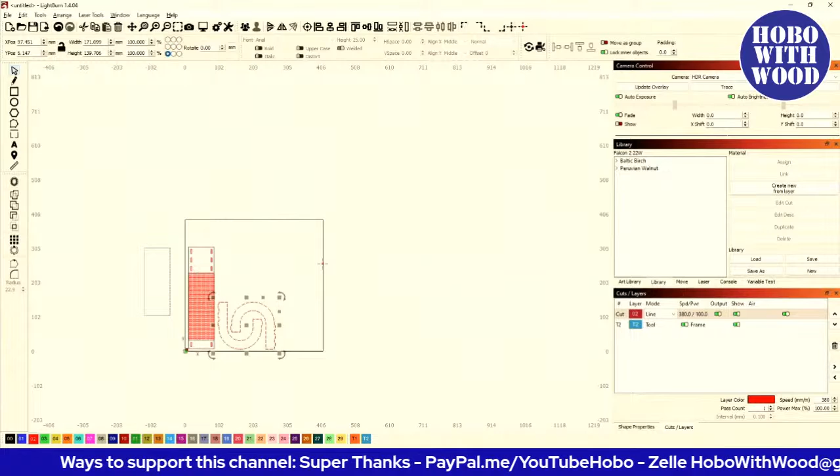And now, what's going on there? "I love the screw ups. It gives me the confidence that I can do it." Yep. And then, weird, YouTube didn't block the above comment. I don't know what comment. Did I miss something that needed to be blocked? I didn't see it. You gotta love people.

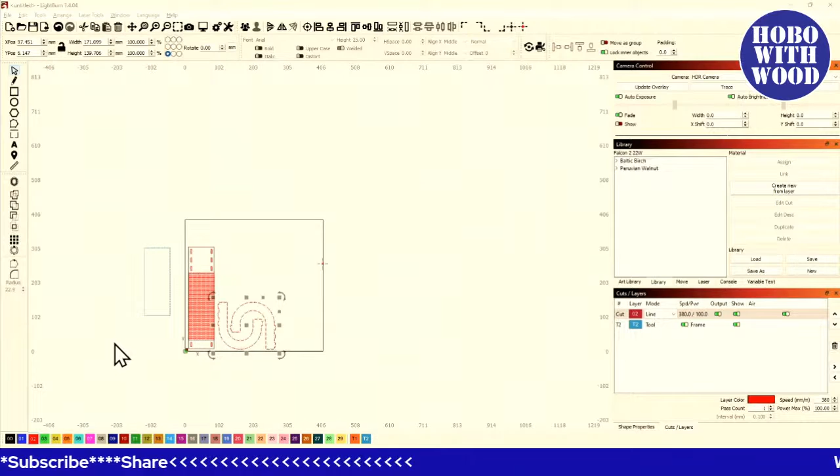Somebody mentioned in the Laser Maker's Realm the other night that they weren't seeing their laser frame whenever they had the lid open, and they had a magnet in place. I learned this today too. This works, but only when you're telling it to fire above 1%. If you've got the fire button turned on, but only at like 0.5% or 0.75, then it's not going to show up. Your fire button has to be greater than 1%. You don't want to go much higher than that because you don't want to start making any marks.

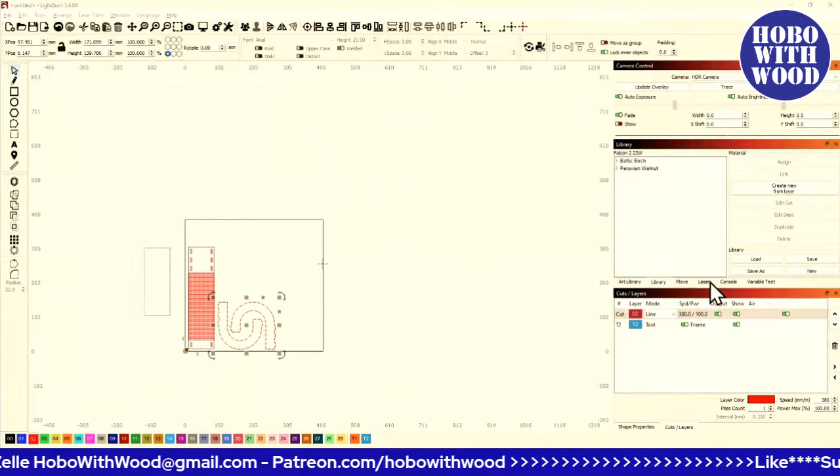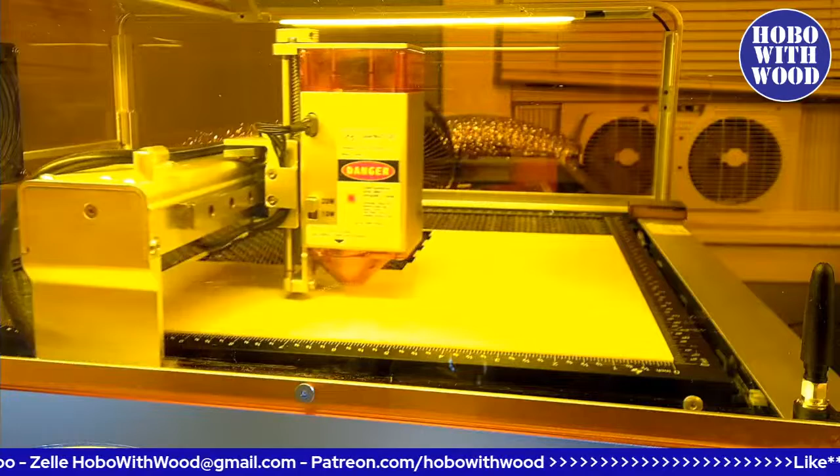All right, so now I'm going to check my frame on this. Let's see here. Go back. Check this frame. Laser frame. And I'm using scrap material here, and I just want to make sure that everything's going to be where it needs to be. And that's a little high. Yep, we got room to bring that down. And just double check that.

And we're going to start. And let's see here, a new toy. Go here, and here, and picture one. Well, I ain't figured that part out yet. So we'll go back to here.

All right, so while that's cutting out, I just designed that in real time, and we're going to cut it out and see if it'll fit together if it doesn't take too long. For you guys that joined in late, I showed how I did it the first time, and it didn't work. And it was because I used offsets instead of starting with primitives, and it did some screwy things when trying to take my measurements. And this piece came out about a millimeter or two short. It wouldn't fit. So anybody got any questions here?

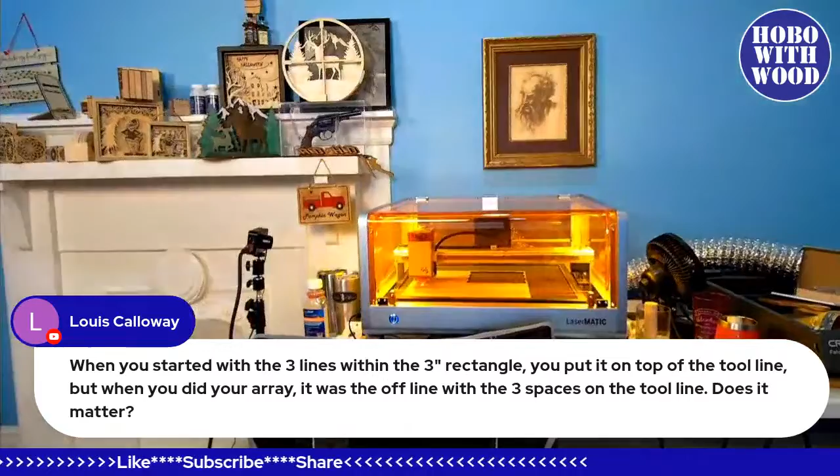Because you don't want it to be, I wish I had, do I have a purse here? Yes, I do. Let me grab this. This is a perfect example. Oh, this is one of my clutches that I designed, and it incorporates a living hinge that allows the ladies to open it up and get to their things, their necessities.

But wherever your tangent, wherever your straight line ends, that's where you want that living hinge to start, because you don't want it to be any higher, because then what happens is you'll have a place that it's too stiff and it's going to stick out. You want that living hinge to start where your straight line ends, so it can begin to follow that contour. And that's why I moved it up to that tool line to start it where that segment ends.

And like whenever I grouped them and then centered them up, I think the bottom of it actually extended a little into the 1-inch piece. So the living hinge came up a little bit higher than the actual 1 inch, but that's irrelevant. It's okay if it goes a little high, but you don't want it to be below where that tangent starts, or else it's not going to follow the contour of that shape.

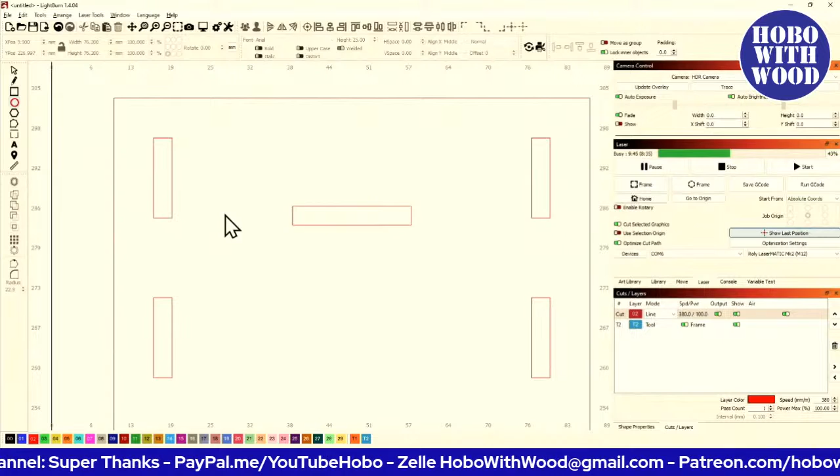But you just take that shape. I was probably better off when I started. Weld those two together and cut that into the back of it. And you can slide a screw head through there. Make sure your hole is big enough for your screw head, and then slide it over that. And then that's a good way to hang it. Man, that's a great tip. I like that idea a lot.

So maybe I need to buy you a margarita. Let's see here. And for those that don't know, Jack's a neighbor. I think he invited me to lunch today, but I was too busy trying to get prepared for this. So I haven't even eaten yet. So, all right.

Yeah, I'm thinking of mounting holes at the top to mount them on the side of my cabinet. I'll glue the magnets up. Yeah. And I like that keyhole idea. And Chuck, why not just use a keyhole or two? Yep.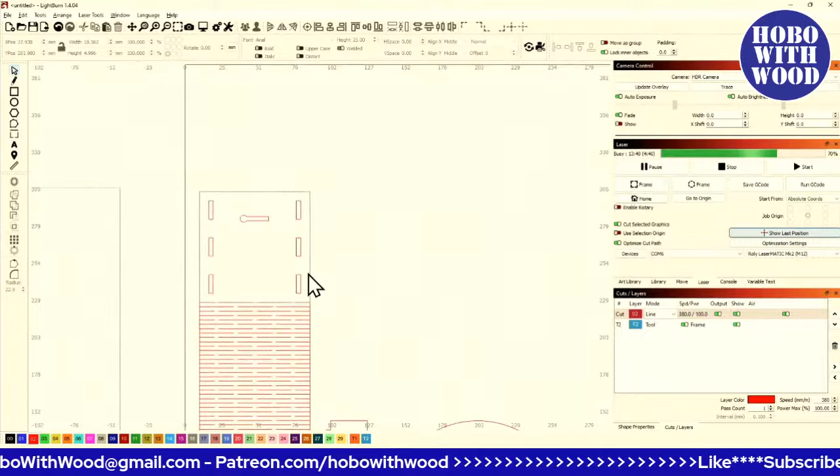And I wish I had a quick way of showing you the living hinge on Amy's purse, but I don't have a photo of that. Patrick, maybe if you're still there, maybe you can grab a quick photo and send it in Facebook Messenger, and I can put it on screen here. That'd be the quickest way, but I don't know if you're still with me or not. But I want to show you what that looked like.

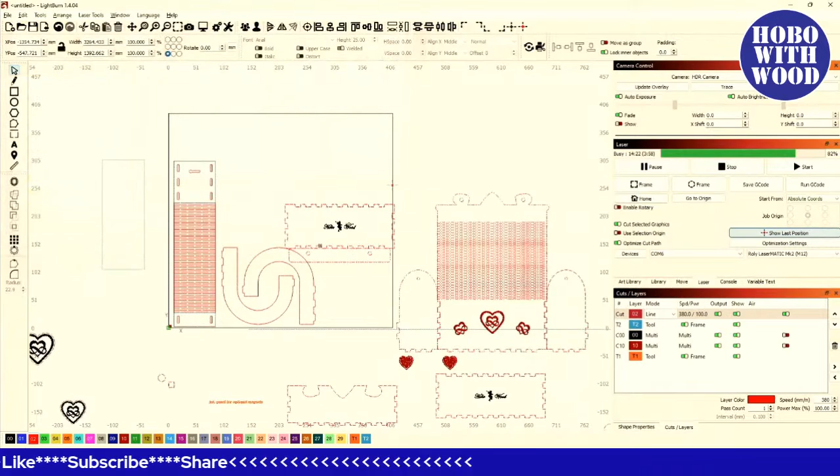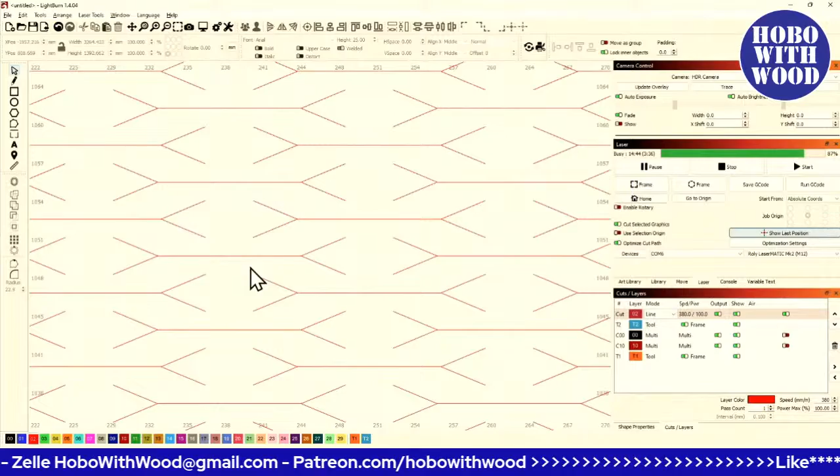I'll go to import, and I'm going to bring in that clutch. You see, these are all the variations of the clutch design that I've built. I've got 15 variations before I finally got to one that I was kind of happy with. And let's get this up here out the way. All right. So this is another living hinge. And instead of just straight lines, this creates a really unique look to the living hinge. And then there's a variation on this where you do a very, very slight offset of that.

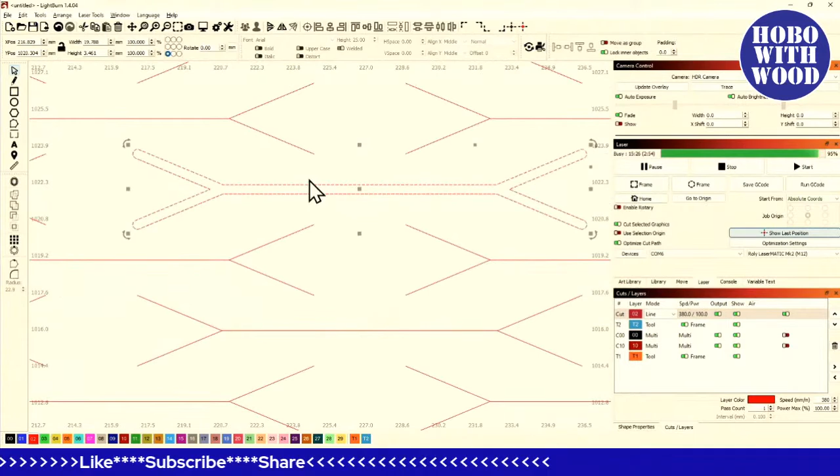In fact, let's grab this one. We'll ungroup all of that to where I can just grab one. Well, it's all ungrouped now. Group all that back together and do an offset outward. Don't need to do an inch. 0.02, no, 0.2. Yeah, like that. And say okay, and delete the originals. And you do a living hinge with that shape. And that

Who was my Australian buddy who was talking about your living hinges that were so stiff? Menu cut and back to here and cut. Chris Gallagher, pretty sure it was you. If you have some living hinges that are really stiff, the more material you can take away and create more flexibility, the better off you are. But you don't want to compromise the structural ability of that hinge. So by relieving more material like that, that might even be an option that you could do.

All right, so let's see where we're at here. It looks like it is. Yep, it has now cut out both side pieces, and is now cutting out the living hinge.

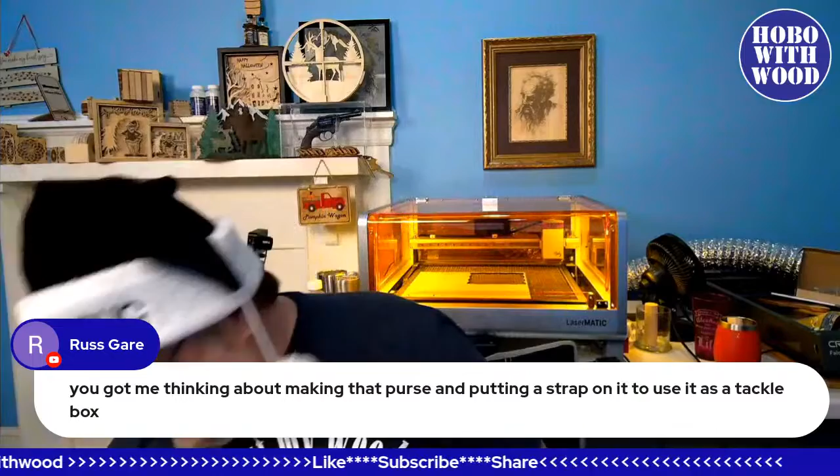All right, so the laser's finished. Martin Short, yes, thank you, Lori.

Martin Short, love him. Is there any particular reason you put the tabs on the sides and the slots on the hinge? Wait a minute. Yes. Because let me get this off here and you'll see. We don't need that no more. All right, so read this again. Is there any particular reason you put the tabs on the sides and the slots on the hinge instead of putting tabs here? And I'm guessing the only way you could put tabs here is if you did it external, so you'd move these

pieces outboard. Well, when it comes to the living hinge, you could, but the problem is if you put those outboard here, like so, and then outboard over here, now you've got no way to force and hold that shape. So it's kind of like the rib in an airplane wing is what this is. By putting this inside here, snapping that together. And you know what I didn't do? I did not resize my slots and tabs, because I designed it with 3mm wood, but this piece is 2.8mm. I meant to show you guys that, because there is a trick on this design that you got to watch out for, but this will still go together.

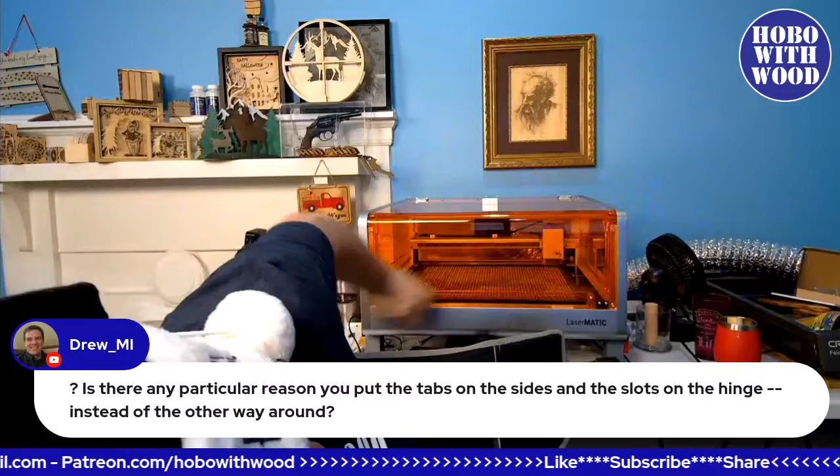Let's close that, make that a little quieter. We'll actually cut it off now. All right. Now, let's see. Yeah, Chris, replace those hearts with fish. Absolutely. Yep, burn's done. We got that off. Chris, yes, my scrap is just, I've got a pile of skeletons over there, and I go to it. In fact, I made this from a skeleton. I don't throw nothing away until there's no meat left on the bones. Nothing.

Hello, Jerry. Yes, El Guapo. That was actually Patrick. That was my nickname at one of the local Mexican restaurants. I was El Guapo, and for those who don't speak Spanish, El Guapo is the handsome man. Some people like to call me El Gordo, but I was El Guapo. And yes, beware of El Guapo. Thank you. We'll have to rewatch. Yeah, there's a lot of stuff in here, Jerry.

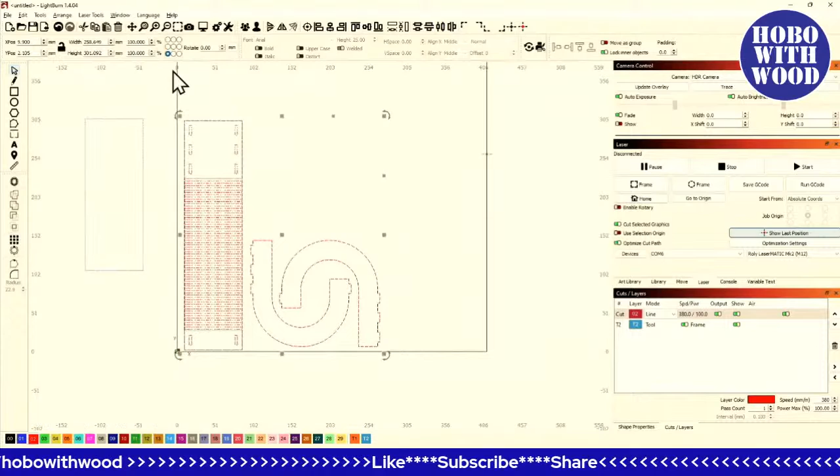Right now, in version 1.4.04, the way this works is not going to be the way it works when they finally release 1.5. Right now, you go into Tools, Resize Slots in Selection. Old material thickness was 3 millimeters. Our new material, and I've got my tolerance level set to 0.5 millimeter, because if you don't have that set...

These are not slots. These protrusions are the tabs, but it's recognizing this as a slot and wanting to resize it. So if you weren't paying attention, you could screw up your design.

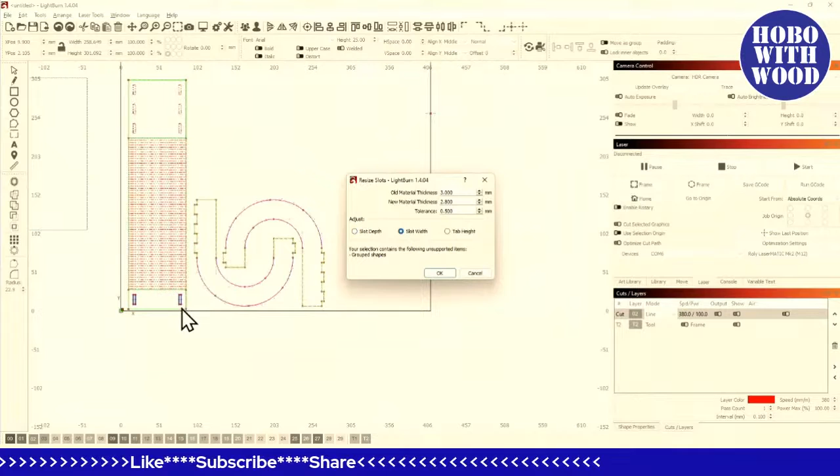Slot width, there we got slot width, but also if you look right here, we got a warning: your selection contains the following unsupported items: grouped shapes. And since it's seeing grouped shapes, it's not seeing these top slots up here. So we have to cancel and ungroup everything.

And now if we go back to Tools, Resize Slots in Selection, and Slot Width, now you're able to see all those slots, and that's the only slot width you have to adjust.

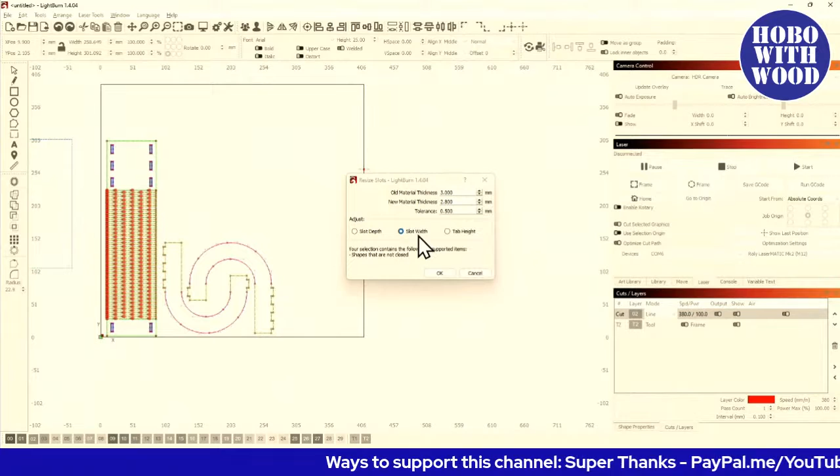But if you change your slot width and say OK, right now the tool closes. And now you got to come back up here, open it back up again, resize slots in selection. Now we need to change our tab height and say OK, and the tool closes.

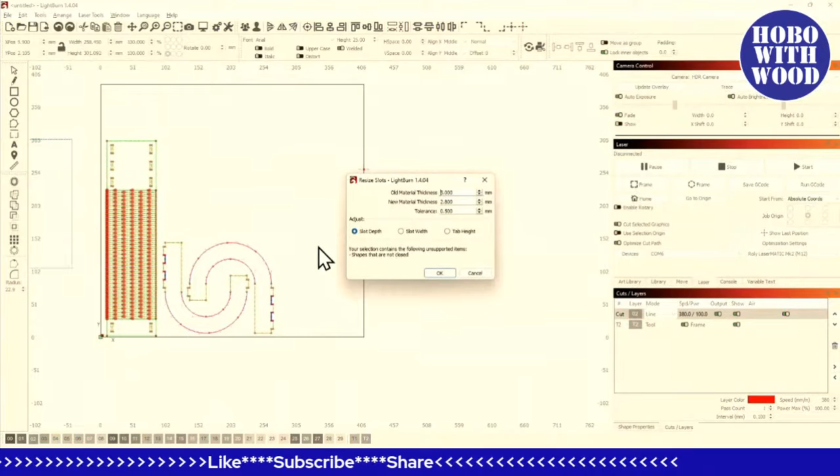Well, in version 1.5, when you open this resize slots in selection, you're going to have the same three options: resize slot depth, slot width, and tab height. But there'll be another option down here that will say apply.

You cannot select more than one adjustment at a time because Lightburn cannot distinguish a slot from a tab - it doesn't know which is which. And if you tried to tell it, say you had slot depths that you needed to change and tab heights that you needed to change, and tried to do them both at the same time, since Lightburn recognizes it either way, it would just confuse the heck out of it and go 'I quit' and go home. That's why you can only do one at a time, and you have to be careful about what you're looking at and what you're adjusting.

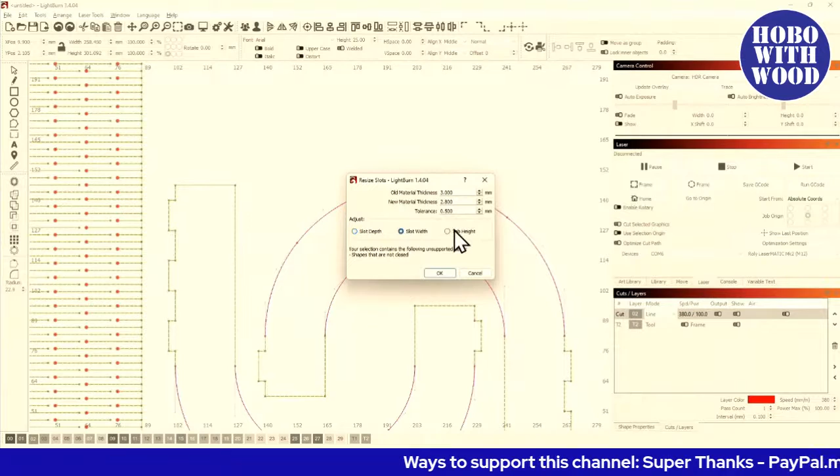But the way that I make these, right now it's recognizing those as a slot. The way you make it not see those as a slot is you go into both of those in node editing. When it's looking for slots and tabs, it's looking for 4 nodes. So those 4 make that tab, but those 4 make that slot.

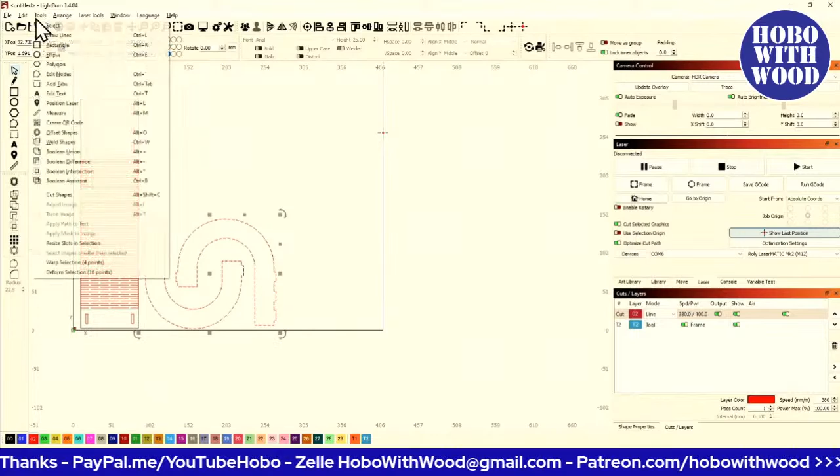Well, that's not a slot. So just come right here and insert a middle node. Just hit the letter M to put a node in the middle, there and there, and again over here and here. And now when you go back in there and look at Tools, Resize Slots in Selection, it no longer sees those as an option to change.

It cannot screw up your file even if you tried to. It's now fixed. Change your tab height, you're done, you're okay.

So that's what I should have done before I sent the job to the laser, but because this file is so tight and measured exactly the length it should be, the tension is holding this together even with the excessive size slot - but it ain't gonna stand up.